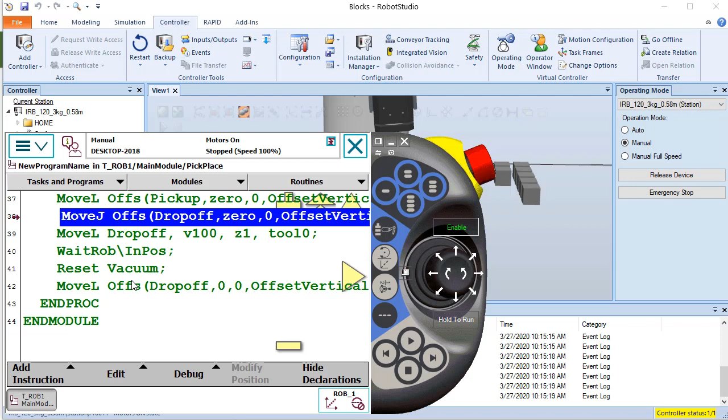Dealing with your program data for your ABB robot on the Teach Pendant can be a pain. All right. If you have the Teach Pendant open, let me go ahead and open that up. And you're dealing with the program editor, and you're like, okay, how do I change the location of drop off, or whatever it is? Let's come up here to block 1. You could say can't do edit, and you're like, well, how do I change this?

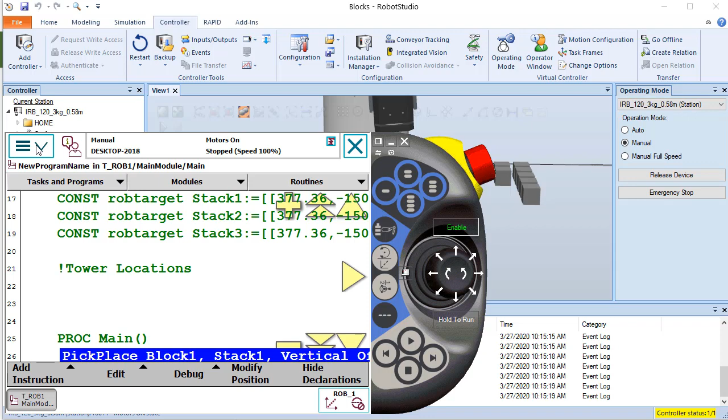All right. So modifying your program data. Now, your program data, there are all sorts of options there. So if we go to the 3 lines on the top left, a little like start menu-esque area, there is, I'm going to call it an application for program data. So we can go ahead and select that. Now, right off the bat, it shows you, right now, for me at least, I have 6 different program datas.

Some of these you'll always have, like clock, load data, tool data, work object data. You probably won't have rob target right off the bat. Now, if you've already messed with the robot, or you've been programming or created locations, you will have rob targets, and you may or may not have nums right off the bat. But these are all different categories. Basically, call them folders. Anything that's a robot target gets stored in the robot target section. Anything that's a number gets stored in the number section.

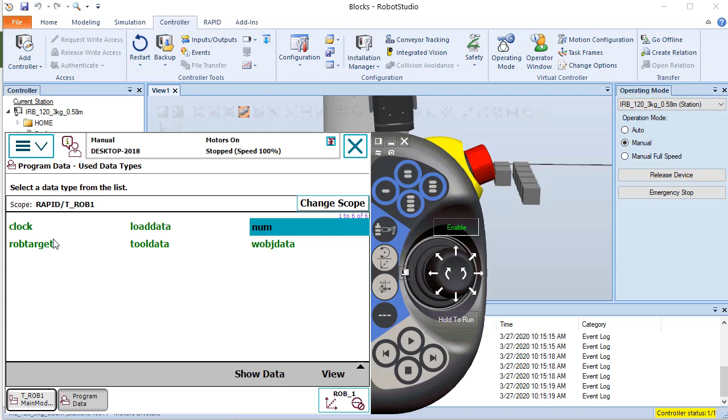So let's go ahead and explore the rob target. So we can go ahead and hit show data. And here you can see a whole bunch of different locations that I have. So we can see I have block 1, and if I click on this, now we have the edit, and we can say change declaration, which will allow you to change the name of it, change your scope, all sorts of other things. You can change the initial value from here by going in there, but you don't have to do it that way. You can also just double click on it. So if I click once and then click again, that will take you into that value section.

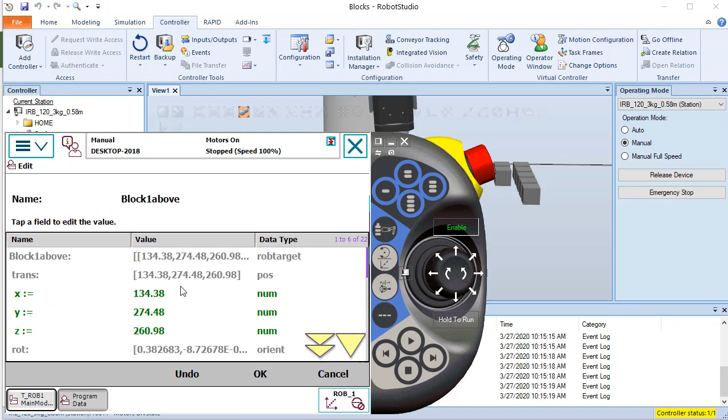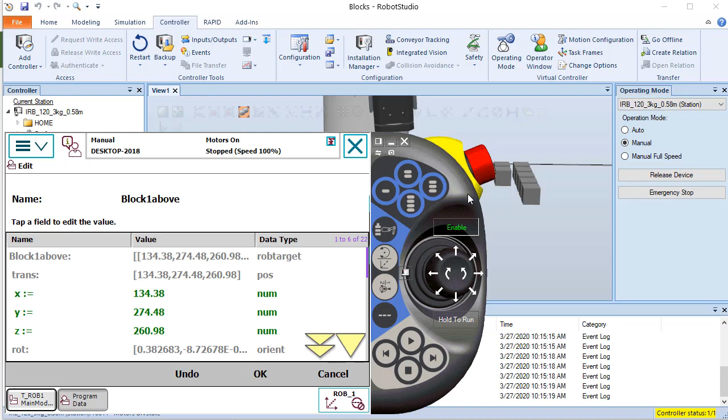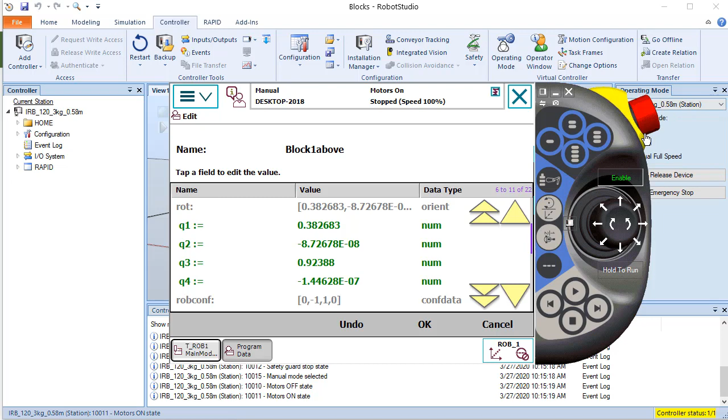Which is nice, because if we change the X, Y, or Z and the robot's in this position with its end effector tool at that angle, when you just change X, Y, and Z, it stays at that exact same angle and orientation. So that part will not change, which is really quite nice. Now, if you would start attempting, didn't mean to press that. If you would start attempting to modify these Q1 through 4s, that will then start changing the angle at which the end effector is grabbing something. So I don't suggest you ever try to manually change these.

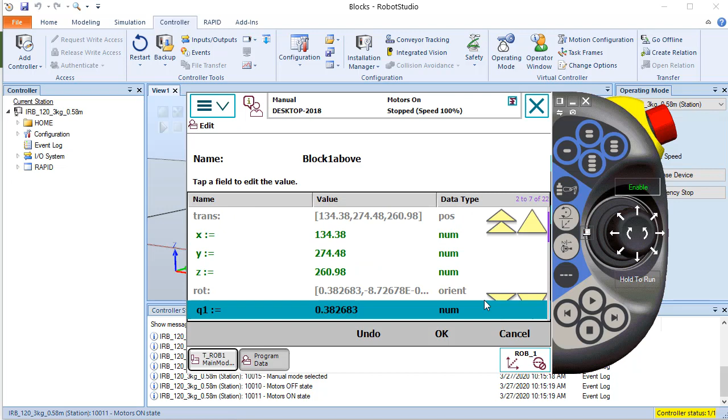Remember, when you square all of these values and add them together, it's supposed to equal 1. I don't understand how that works, but that is, from my understanding, how that is supposed to work, at least. So something to be aware of. I've just given up on modifying Q1 through 4s manually. I will always modify Q1 through 4s via jogging the robot around. Now, let's say you did want to change that. All right, now let's go back. We'll come back to changing in a second.

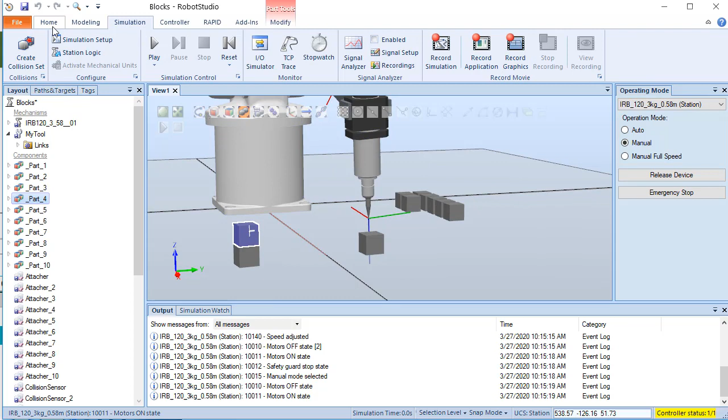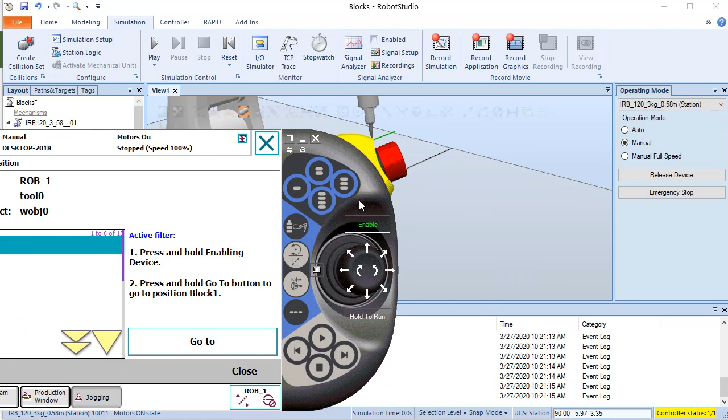One of the best ways to get the robot to a position. So you're like, okay, where is my magical position here? So let me go ahead and reset everything. Go back to manual, go back to enable. I want to put the robot back to block 1. And how do I know I'm going to get exactly to block 1? The easiest way to do that is to go to your jogging screen, say go to, select it, and then you have to click and hold go to. And as you see, the robot will move to that specific position. All right, and even if you keep holding it, once it's there, it will just stop.

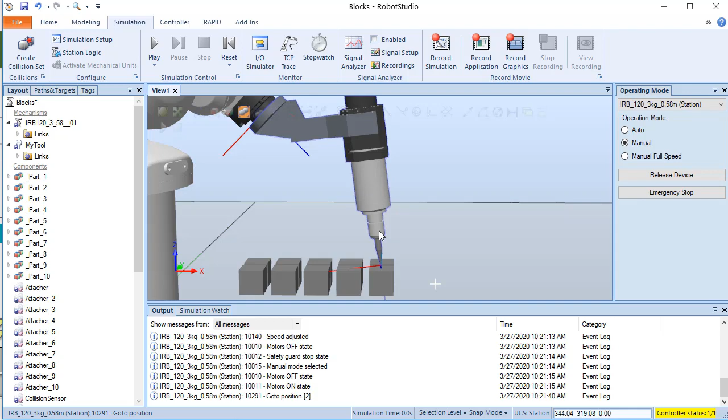Now, maybe you say, I don't like this, right? If this was truly a suction cup, that's not quite accurate enough for me. That's not vertical enough. That's why we're having a suction issue. All right, then we can go back to the jogging screen. We hit close. Ideally, you change your tool to the tool that we're using, which I don't have loaded. So when we rotate this, it's going to be around the axis up here, not around down here, which will cause a little bit of problem, but it won't be too bad. We can deal with that.

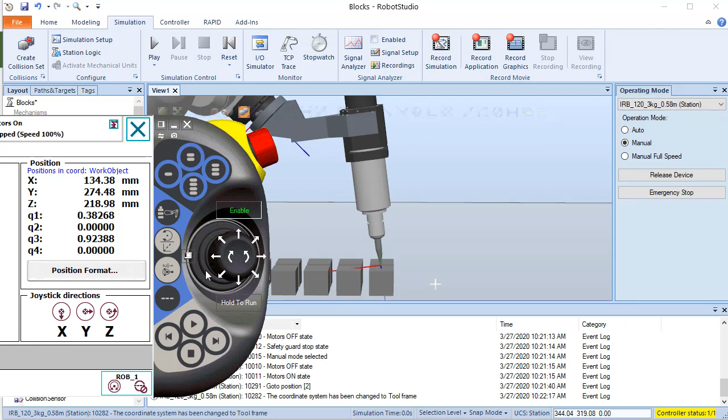We're going to go into reorient mode, which we can tell by the little circle here. It also says reorient under motion mode. And we can, not the button I want to press. So it's going to be this one. I can work on making that more vertical.

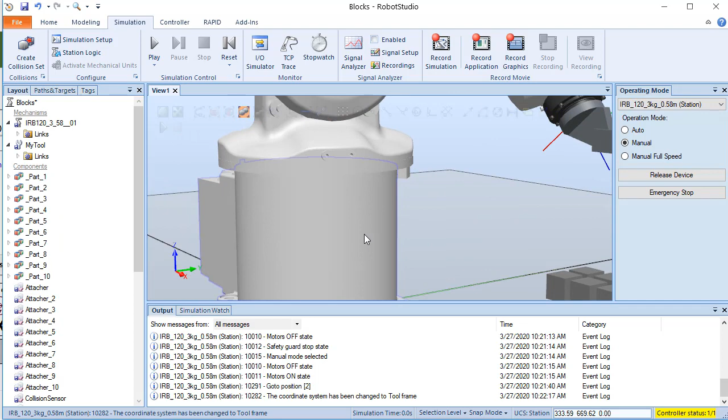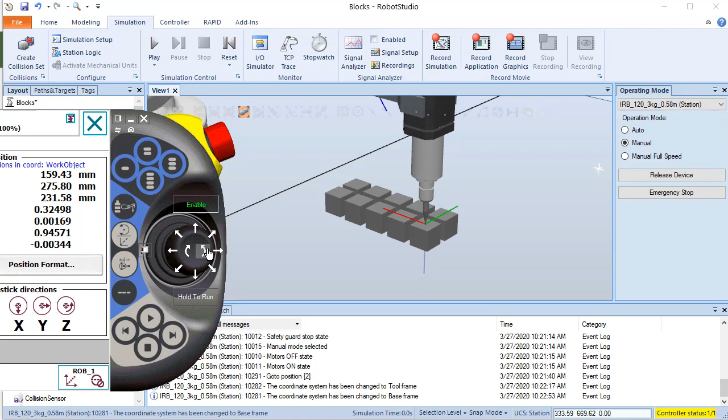Alright, that looks to me to be pretty stinking vertical now. Now we need to get it back to our actual desired location. And yeah, I know it's kind of a pain to have to constantly reorient yourself, but that's just the way the game goes. As you can see, we're much more vertical now. Within my 5 millimeters, everything is looking good. So that is what I want my new block 1 to be.

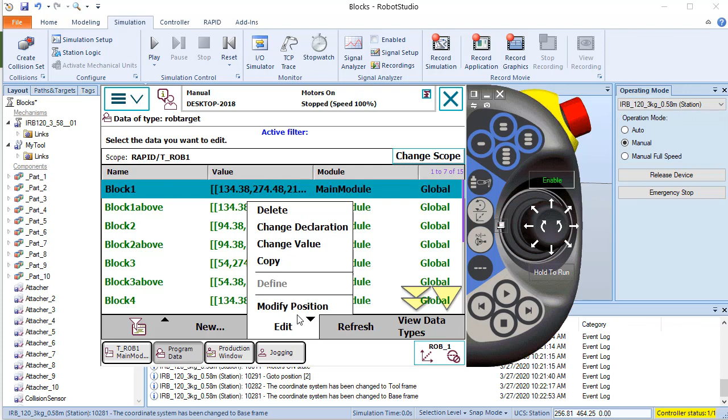So if we come back to this, we go to the flex pendant, we go back to program data, we go to block 1, we can do edit and modify position. Now this will pop up saying this operation cannot be undone. So once you've changed it, it's done. Now luckily we are in a simulated environment, so you can save your program pre and post with a different name, and that will allow you to go back to those original positions if you would ever need to.

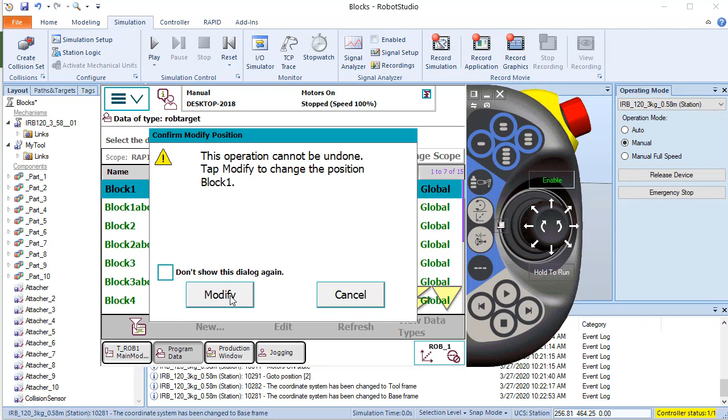However, if you're doing it on a real robot, you can't do that. So make sure you are truly ready to modify that position. Also, even more importantly, make sure you're modifying the right position. I've done it many times where I think I have block 2 selected and I have block 1, and I do edit, modify, and I'm like, why does it never go to block 1? Why does it always go to block 2? And it turns out I modified the wrong position. So make sure you've modified the right position.

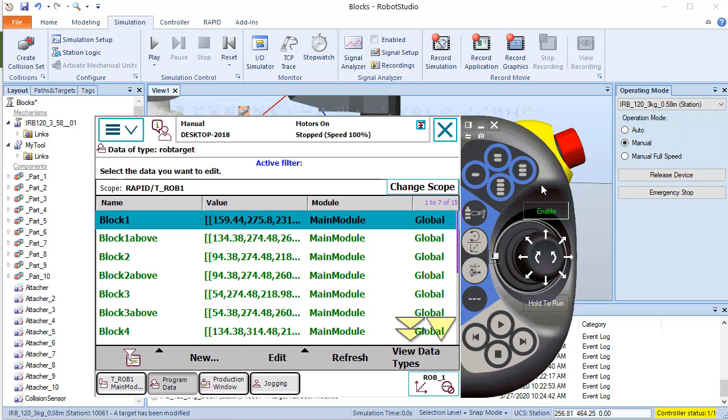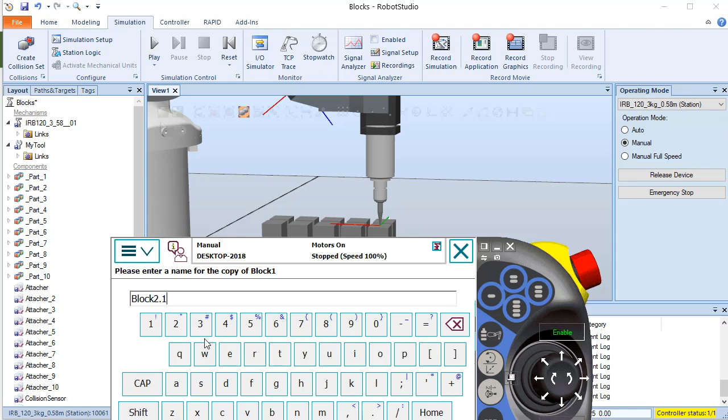Now what we can also do is we can copy this block. Say you wanted to make a new block 2 that's using my new orientation. I could say edit, copy. We're going to call this block 2.1. Go ahead, hit OK. Doesn't like my point. Okay, we're going to call it block 21.

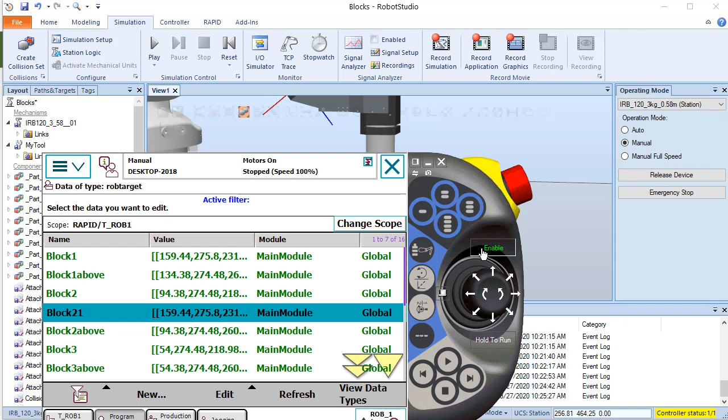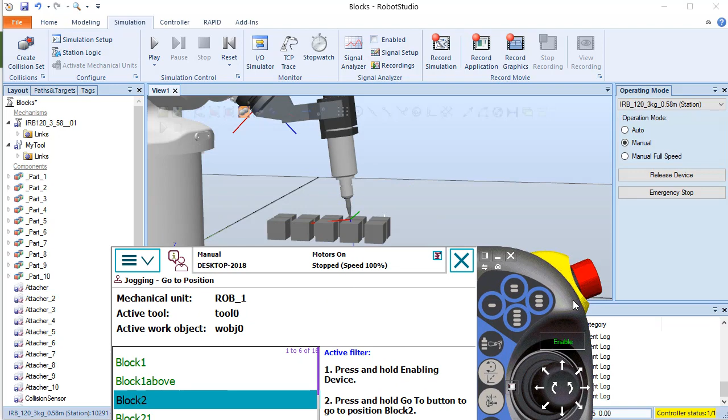And now we need to move in the X direction, negative 40 millimeters. So I can come in here and go edit, change value, X minus 40, so 119. Hit OK, hit OK. And now if I say go to block 21, you'll notice I'm in that exact same orientation, whereas if I say go to block 2, I get my angle back. So that makes our life a lot nicer. You can very easily duplicate data and move the location. The program data is a very powerful window.

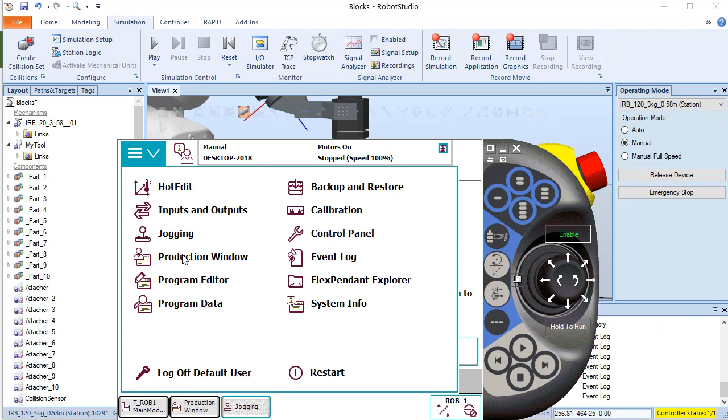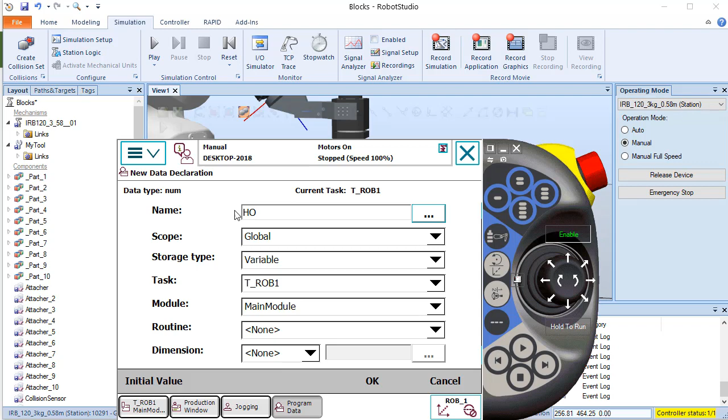Now, if you want to go modify our numbers, we hit the exit button at the top. Oh, jogging window, not actually what I wanted. Go back to program data. If you hit view data types, it would take you back to the options. So we can go to numbers now. These registers we don't want to change, but notice I have my vertical offset distance at 50. So you could create a new one called horizontal offset and set the initial value to be 20 or 15 or whatever. Every time we do that, we are creating new variables, and we can come through and edit these.

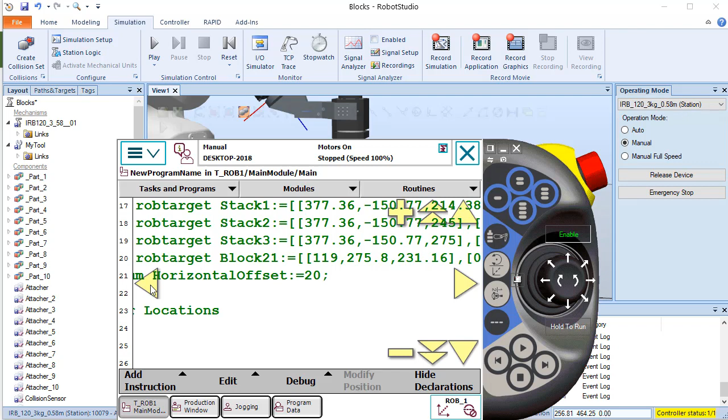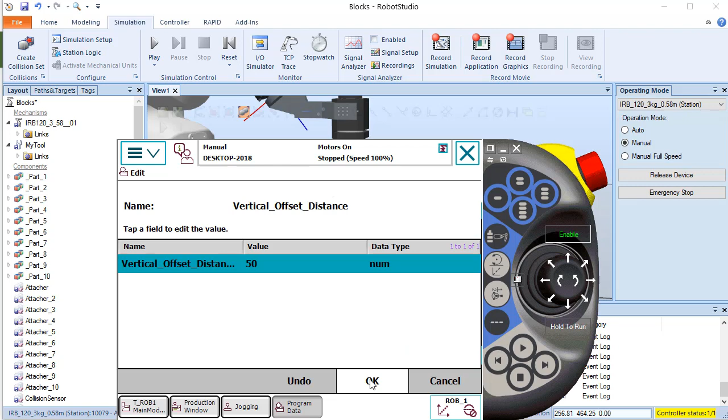If we look at my code, at the top, you'll notice that I am passing my vertical offset distance here. Well, if I determined that wasn't the right height, I could just come to my program data, change my vertical offset distance to 30, 50, 80, 100, whatever I needed, hit OK, and I'd be good to go. So that program data screen is a very powerful tool.

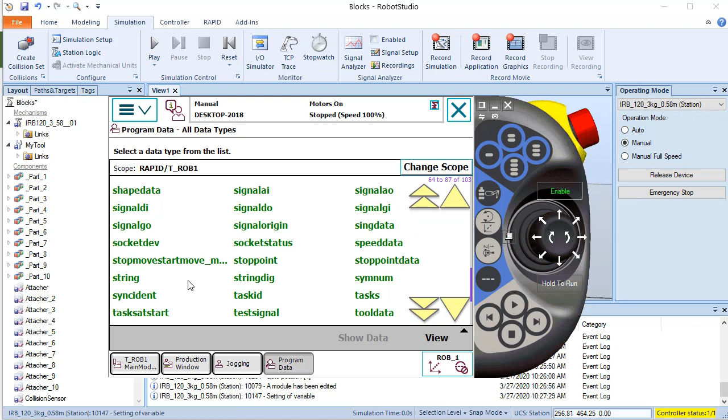Now, notice it's only showing us data types that are being used. If you want to see the ones that aren't being used, because you want to create a new one, you could do all data types. We could come down here and do a string. Show data, new, string 1, initial value is hello world. Hit OK, and OK again, and I now have that. And if I go back to data type showing only used, you'll see that string shows up. So very powerful little section.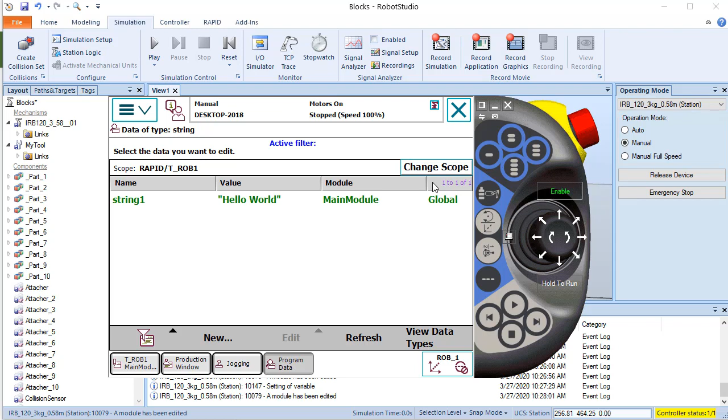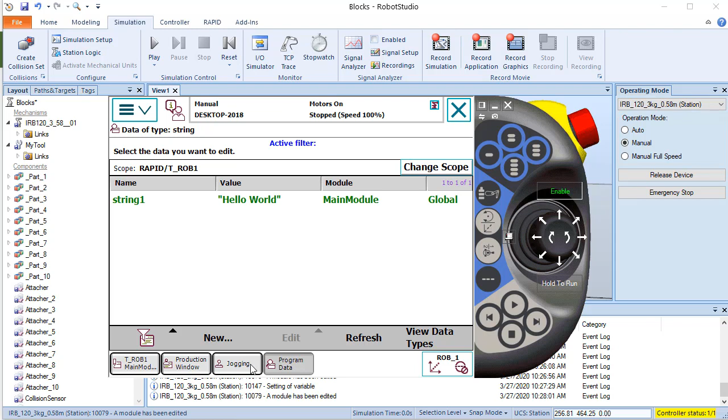You can do this on a computer right in the actual code. But when you're on a robot trying to do something quick, this is where you want to come to modify things. Like that position is a little bit off, I need to tweak it slightly. You're probably going to go back and forth between program data and jogging. Go to a specific position, tweak it slightly, then come to program data, go to robot target, go to block 2, modify it, and you'll be good to go.

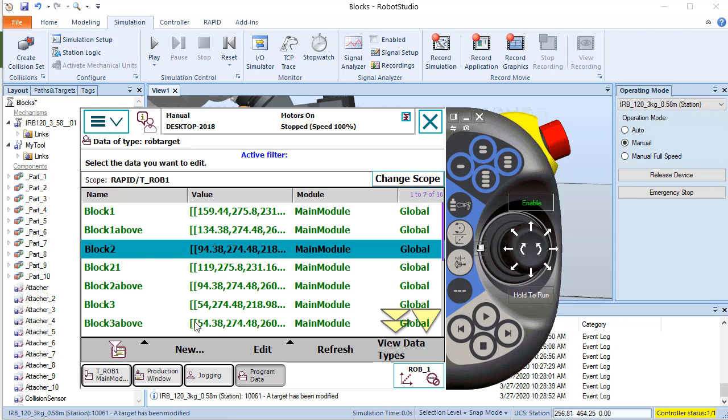So a very easy way to get a stack of 3, or to create your pyramid or whatever it is. A very powerful tool for creating your variables very quickly, even though it's using a simulated touchscreen and you can't just type out variables. And that is about it for the program data screen.